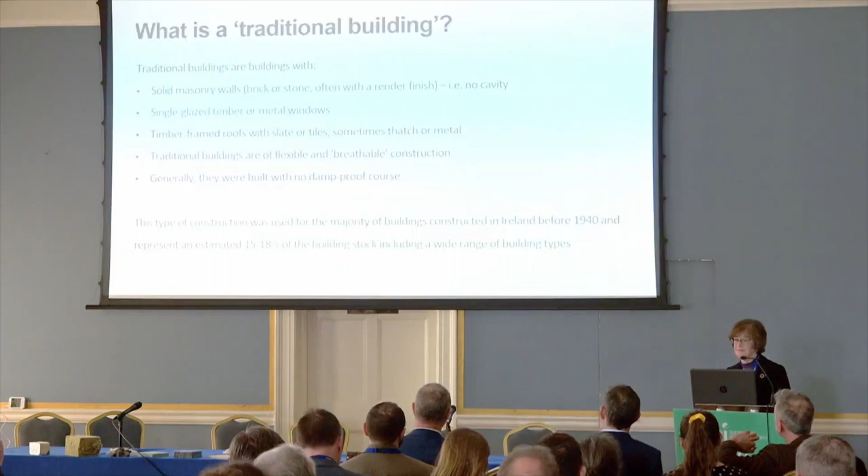So what is a traditional building? We've defined it as buildings built with solid masonry walls, maybe masonry, brick or stone, often with a rendered finish, so not cavity walls. They were usually built with single glazed timber or metal framed windows, timber framed roofs, and slate or tile coverings, sometimes thatch or metal.

And they're flexible and of what we call breathable construction, generally built with no damp-proof courses. This was the type of construction used in Ireland for the majority of buildings built before, say, 1940, and it could be between 15 and 18% of the existing building stock.

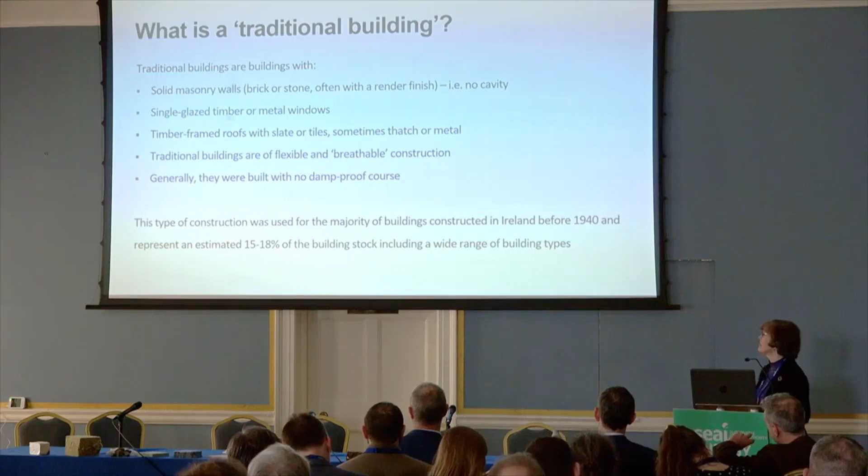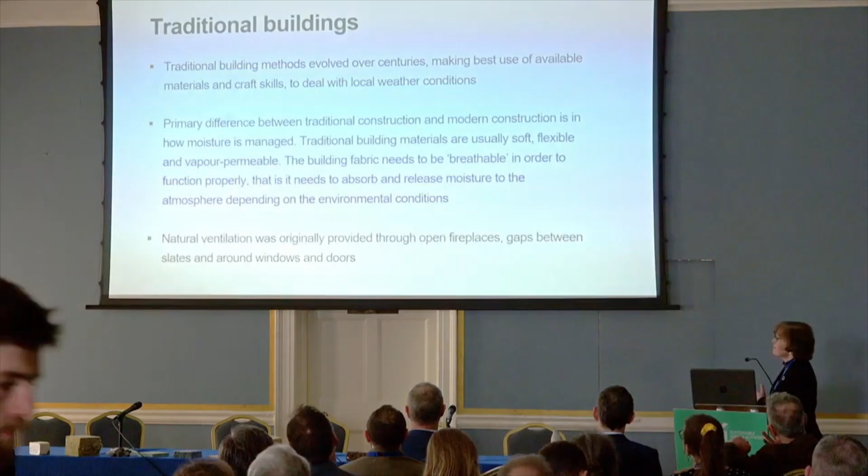So the methods used to make traditional buildings evolved over the centuries, using local materials and local craft skills. They knew, by trial and error, what the local weather conditions were and how best to provide shelter. The main difference between traditional construction and modern construction is really how moisture is managed within the building fabric.

These building materials are usually soft, flexible and vapor permeable, and need to be breathable - able to absorb moisture from the atmosphere when the weather is wet and then release it when conditions improve, without the moisture penetrating right into the interior of the building. There was also a lot of natural ventilation through open fireplaces, gaps between the meeting rails of sash windows, and around windows and doors.

But it's important to note these buildings weren't built to be drafty. They may have become drafty over the years as buildings settled and joints opened in windows and doors, but people didn't build these buildings to be uncomfortable. They were built to the standards of the day, to provide comfort for the inhabitants.

So it's important to stress that these traditional buildings and the works needed differ regardless of statutory protection - we're not just talking about protected structures and architectural conservation areas. We are really talking about how these buildings were constructed and the building physics in which they operate.

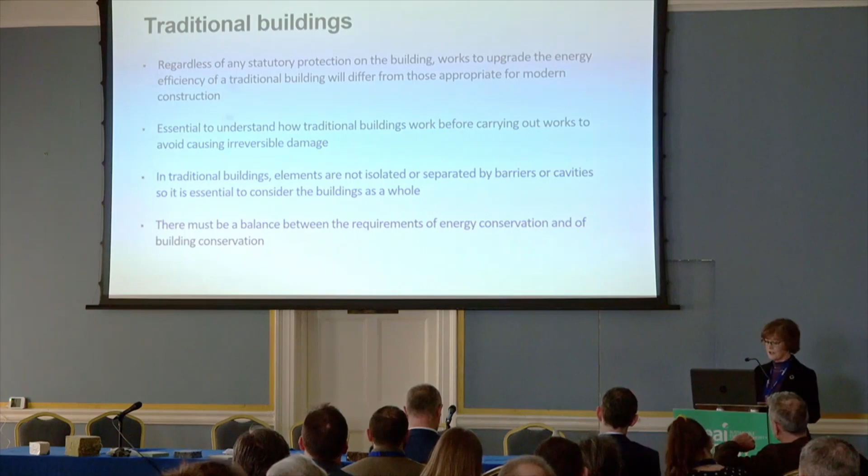So we produced a book, back in 2010, just to advise owners on what they needed to bear in mind when commissioning works to their buildings to upgrade them. It included a couple of small drawings to show the differences between modern construction and traditional construction - it's been compared to the difference between a raincoat and a greatcoat, though I don't think the term greatcoat is used that often anymore.

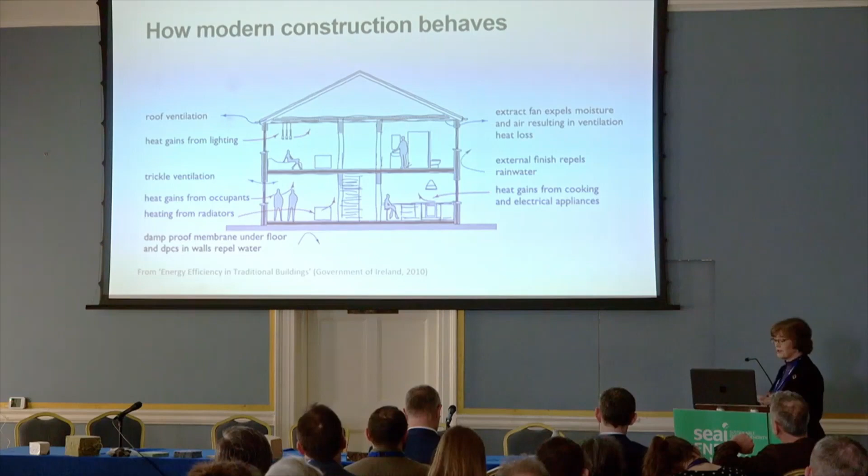A raincoat is all about repelling moisture from the building, making sure nothing gets inside. So modern construction has dense, hard renders on the outside. They have deep foundations to make sure the building doesn't flex at all. They have damp-proof membranes under the floor and damp-proof courses within the walls. And then you have to provide ventilation, trickle ventilation through the windows maybe, or extractor fans and the like.

Whereas traditional construction accepted the fact that they were going to absorb moisture, that it was going to come up through the floors and dissipate into the house, and come in through the walls but not penetrate the whole thickness of the walls. Before then, they were allowed to dry out. There was a certain amount of gratuitous ventilation provided through meeting stiles of windows,

gaps between slates and open fireplaces as well. So there are risks associated with altering a building that has been giving good service for 150, 200, maybe even more years.

Therefore, we would claim that the specification of retrofitting works should generally only be undertaken by those that are competent and have the necessary skills and experience, and know what they are dealing with and what the likely outcomes are. Where a project is particularly complex or the building is of high architectural heritage significance, there's yet another particular skill set that will be required of the specifier and the installer.

But there are certain low-risk interventions that a good, skilled and experienced contractor or craftsman can do, particularly where the building isn't protected.

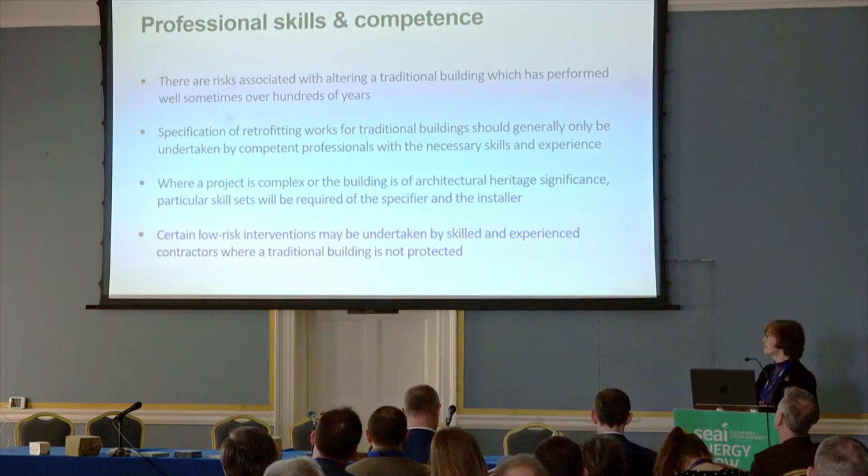There are several different types of statutory and regulatory requirements that you need to be aware of. There are actual, living, working buildings that are protected under the National Monuments Acts because maybe they have some medieval or early fabric in them. But the majority of the architectural heritage of this country is protected under the Planning and Development Acts, where buildings can be protected structures, located in architectural conservation areas, and there may be other buildings protected in various other ways.

Building Control Acts and regulations are another thing to bear in consideration, and it's important to note that buildings protected under the National Monuments Acts are exempt from having to comply with the building regulations.

Building energy rating then, coming out of that. There are a number of exemptions for the requirements for BER and for compliance with TGD L of the building regulations, and that includes protected structures, buildings used as places of worship or for religious activities, and buildings protected under the Monuments Acts. So a lot of those will be of traditional construction. But that's not to say people won't want to upgrade the energy performance of these buildings, and it is possible, but just to know they don't have to chase the particular legislative requirements.

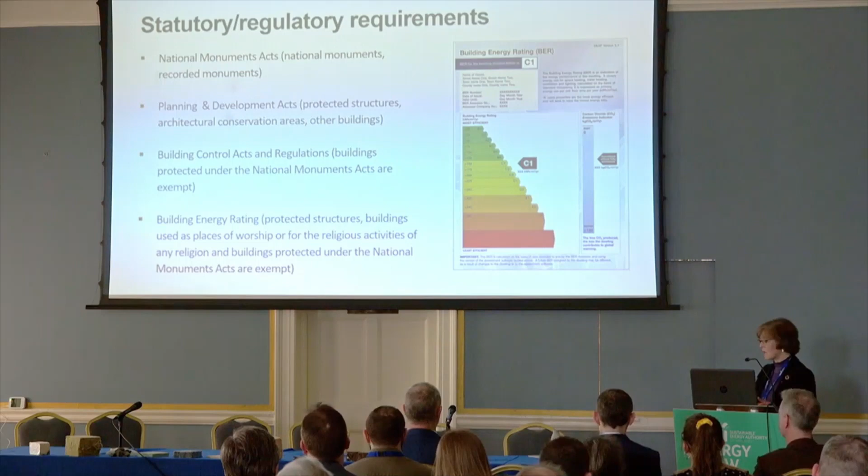Important, before you start doing any works or even considering them, that you understand your building: approximately when it was built, what its architectural heritage significance is, what construction methods and materials were used, and what kind of alterations or interventions may have taken place later, and whether they are appropriate or not.

There may have been interventions such as a lime render being removed and replaced with a cement render, and maybe that should be undone now to allow restoration of the vapour permeability of the wall.

And then it's important to look at the condition of the building as a whole, because before any retrofitting works begin, it is really important that your building is in good repair and dry, because a damp wall transmits heat at a higher rate than a dry one will. To the extent of 20 to 30%, energy efficiency improvements could be made just by having a dry wall.

Now, it can be a long process to dry out a masonry wall that could be 800 millimetres thick if it's a medieval wall, or even larger.

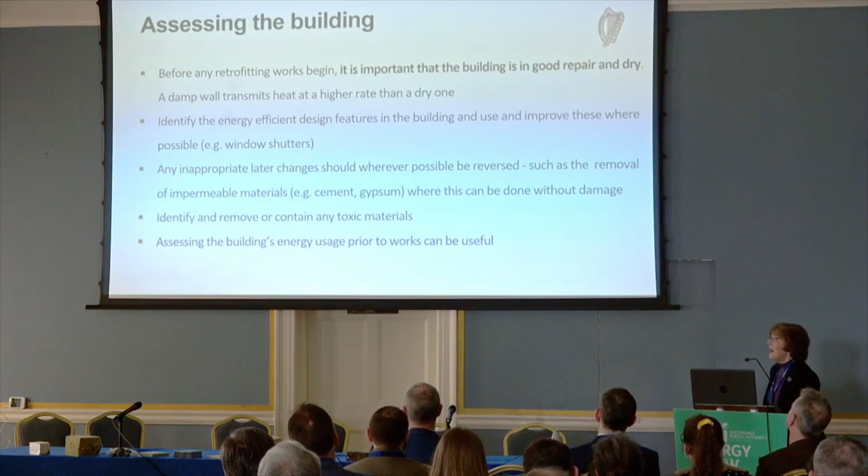Also look at your building and see are there any energy efficiency design features in the building and how you could use and upgrade those. Many buildings, particularly from the Georgian and Victorian periods, the 18th and 19th centuries, would have had timber shutters, and they can be upgraded and provide very good energy efficiency when they're closed. Again, any inappropriate later changes, try to reverse them where it can be done without damage.

Many times it can be very difficult, damaging and expensive to try and remove things like Portland cement from pointing or render and the like, so that will need to be carefully assessed as to whether it's worth doing or not. Obviously, identify and remove or contain any toxic materials in the building.

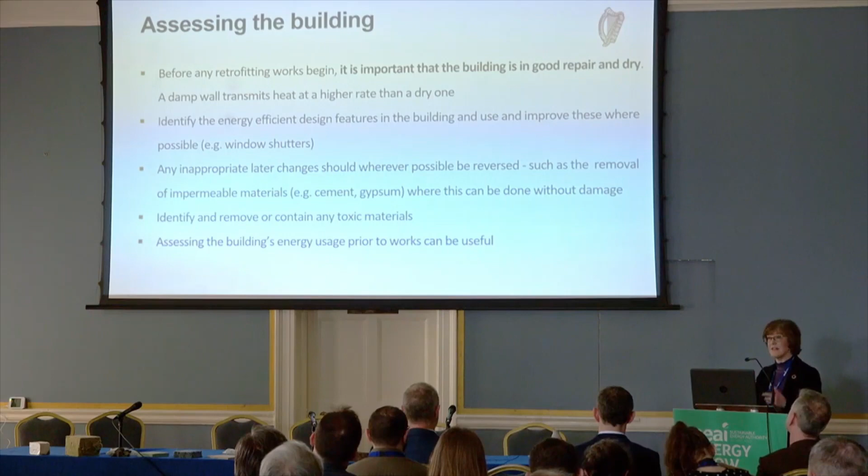It can also be very useful to try and get an assessment of what the building's energy usage was before the works were carried out, so you can compare that to what you're getting at a later stage after the retrofitting works. You need to pay careful attention to ventilation and indoor air quality in these kinds of buildings.

Air tightness, ventilation, and indoor air quality are all interdependent, and any retrofit plan needs to address all these together, because good ventilation is critical to the well-being of most traditional buildings. If you get high moisture content within timbers in your building, you could make things like timber joists, timber rafters and the like very vulnerable to rot and insect infestation.

You also need to be very careful that you don't trigger any interstitial condensation - condensation that happens within the depth of a wall - and that can be very damaging because it's invisible. And as we've all learned over the last few years, people too require properly ventilated living spaces for their health and comfort.

Just to say a word about sustainability in historic buildings, because many times we're faced with people who say the best thing you do is knock it down and build a new A-rated house. But actually, the greenest building, as has been said, is the one that's already built. It is there, it has already paid off its carbon footprint by lasting for hundreds of years.

The continued use and reuse of our older buildings is going to be extremely critical going forward to avoid greenhouse gas emissions, because too often, up till this, carbon reduction strategies for the built environment have really concentrated on the operational emissions - the amount of energy that goes into heating, lighting and using a building and the performance of the fabric - rather than looking at the carbon issues as well.

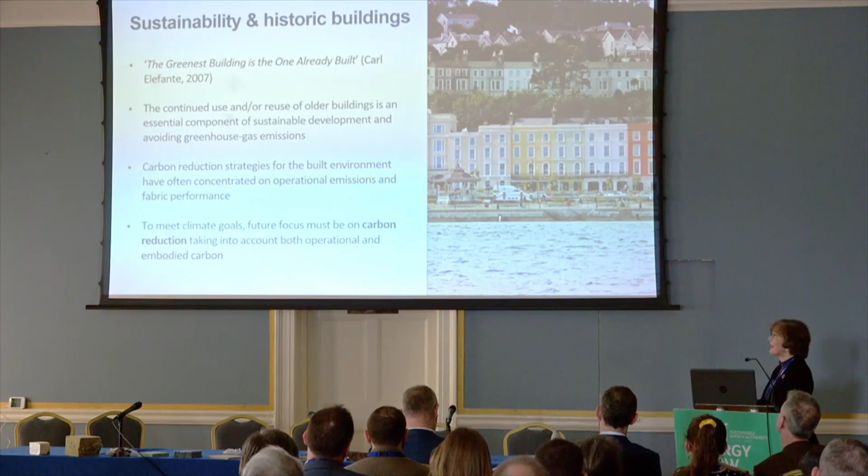We really do have to take account of the carbon emissions when we're looking at our buildings, because that's what counts - how much greenhouse gas is going into the atmosphere. So we're looking at life cycle analysis as well to assess the sustainability of new buildings versus maintaining, refurbishing or replacing existing buildings.

We have to bear in mind that if we demolish a building, we lose all the embodied energy in it, we lose most of the materials in it. That all has to be carted off, put in landfill. And then we have to also bring into account the production, importation, bringing to site and construction of a new replacement building and the kind of emissions that that entails.

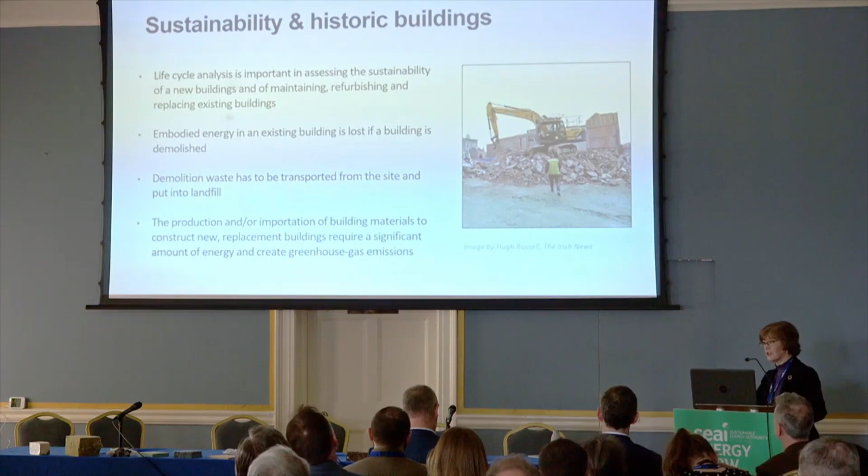Studies have been done - we're commissioning a study here as well - but studies have shown it takes decades to replace a standard size two-storey traditional building with an A-rated modern construction. So we don't have that kind of time anymore to get the emissions under control.

Our older buildings were designed to maximise natural sources of heating, lighting and ventilation. Energy, when these buildings were built, was expensive compared to people's incomes. It was really only in the second half of the 20th century that fossil fuels became very cheap and central heating and the like became standard in housing.

But older buildings were actually built to try and contain the heat, to provide comfortable living conditions. Our building stock is also made of very durable, long-lasting materials with reduced refurbishment cycles, and therefore in the long term, over their lifespan, they will use less energy. Generally their building elements are very easy to repair - it's easy to repair joinery, to take out a rotten piece of a window and replace it with just a single piece, or to repair ironwork as well.

So we produced guidance when all the architectural heritage protection legislation first came into force. These guidelines were originally for planning authorities to tell them about their new roles under the Planning and Development Act. But these are the principles of conservation that are internationally accepted and agreed to, and we just re-explain them in an Irish context.

So not in any particular order: it's about keeping the building in use, giving it a viable and economic use and value to its owners, researching and analysing the building itself, using expert conservation advice to make sure that any changes you make will not be detrimental to the building, protecting what is special about it in the first place, minimal intervention—trying to do as much as is necessary and as little as possible, as the Burra Charter says—repairing rather than replacing, using the right materials and the right methods.

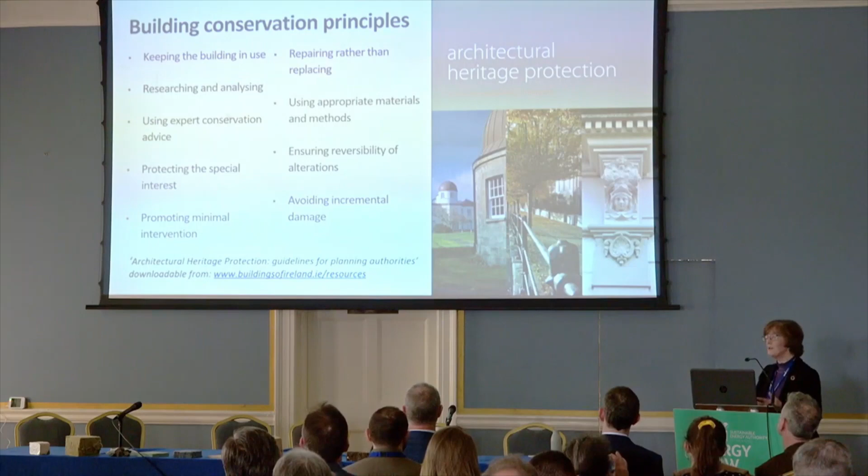And then making sure wherever possible that things can be reversed. I think this is particularly the case with retrofitting, so that if something goes wrong and it's shown not to be working and it's damaging the building, it's possible to take it out without having caused irreversible damage. And then avoiding incremental damage by small changes that on their own might not seem too bad, but cumulatively can really damage the character of a building.

But a lot of these also fit into the kind of principles we should have for retrofitting: good maintenance, keeping the building dry and in good repair, using compatible materials—the correct ones that are vapor permeable, capillary active when you're using mortars and the like—making sure there is adequate ventilation for the health of both the building and its occupants, minimising waste, so wherever you can, upgrading and repairing existing elements rather than throwing them out and replacing them, and balancing the need to conserve energy with minimising the impacts on the character of the building and its historic fabric.

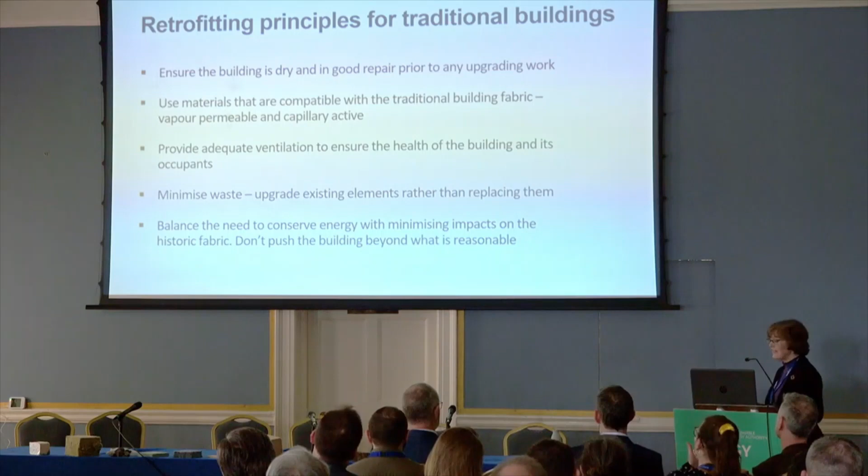And really, it's all about not pushing the building beyond what it can reasonably achieve.

So to get onto the guidance that we're going to publish later this year, it builds on this document that we produced in 2010, which was for owners, but this one is going to be aimed at the professional user, the specifiers, the installers of retrofitting works. But we do hope they'll be readable and understandable by a wider audience.

So it's going to be more strategic than prescriptive. It's very hard to have standard constructional details or standard retrofitting details for historic buildings, because almost all these buildings are different. Even if they were built at the same time, they'll have evolved differently—there'll have been changes to them over the course of their lifespan. So we're going to illustrate good practice and establish the principles and processes to be followed. It's going to be titled Improving Energy Efficiency in Traditional Buildings.

Just to give you a brief idea of what's going to be in it: Chapter 1 is going to explain what we are calling traditional buildings and the kind of buildings covered by the guidance, the statutory regulations that apply when you're altering a traditional building, and issues to do with the building energy rating system and its application to traditional buildings. There are issues about BER and how it rates traditional building fabric, which you're going to hear more about later—they're often very much underrated in how they perform, their thermal performance.

And that leads to problems then, that people may overspecify retrofitting works that the building actually doesn't need, and then you don't see the savings you were expecting, because actually your building was performing much better in the first place before the work started.

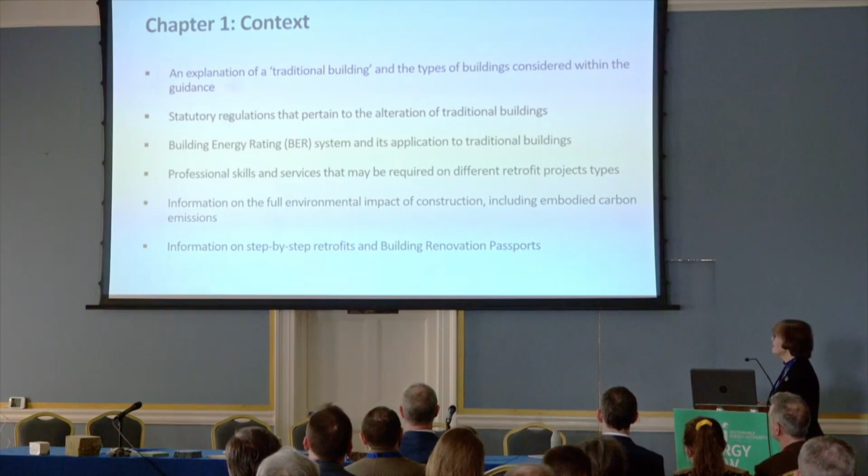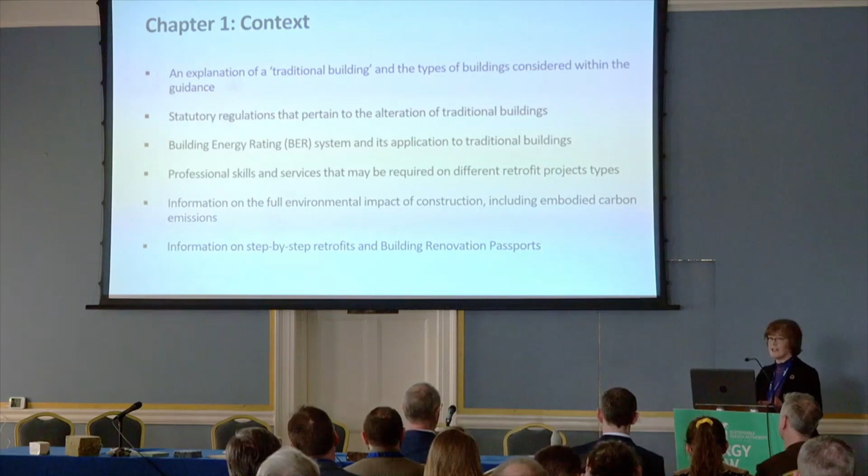We talk about the professional skills and services that might be required. Information then on the full environmental impact—we're really only touching on this—but taking into account the full environmental impact of construction and the embodied carbon and other greenhouse gas emissions. And then information on using building renovation passports to do step-by-step retrofits and make sure you don't get locked in by early decisions that might preclude later, better upgrading measures.

Chapter 2 will talk about understanding the physics of traditional buildings and how they work, how moisture moves through the fabric, how you might assess the building to determine if there are any thermal bridges, air leakage, or any existing damage, how to calculate U values for traditional buildings, and then the kind of risks there might be associated with retrofitting, like indoor air quality issues mentioned before, the build-up of harmful substances and gases, and how to avoid this happening.

The meat of the guidance will be in Chapter 3, which is about the retrofitting measures that are available, the steps that need to be followed when developing a retrofit strategy, and the works you need to do before you even start. This covers the materials appropriate for retrofitting works on a traditional building, preparing and installing different measures for different elements of the building—roofs, floors, windows and doors, and walls. Walls are probably the most problematic when it comes to upgrading a traditional building.

And then we look at other non-fabric efficiency measures that might be easy, low cost and easy to implement.

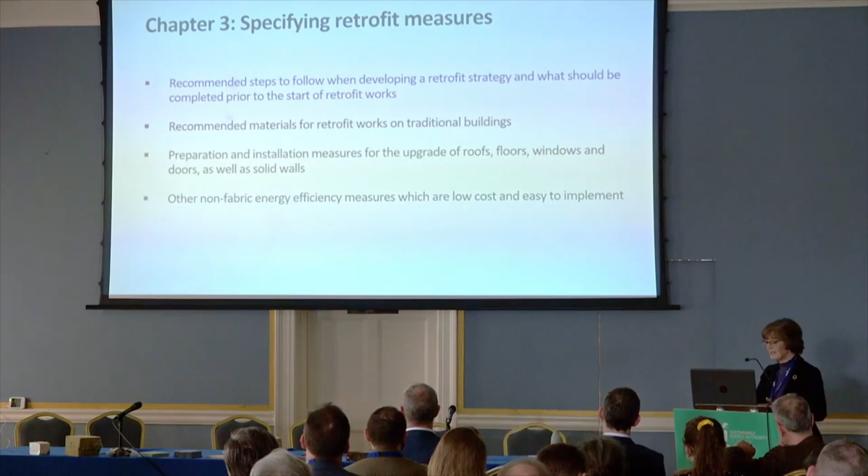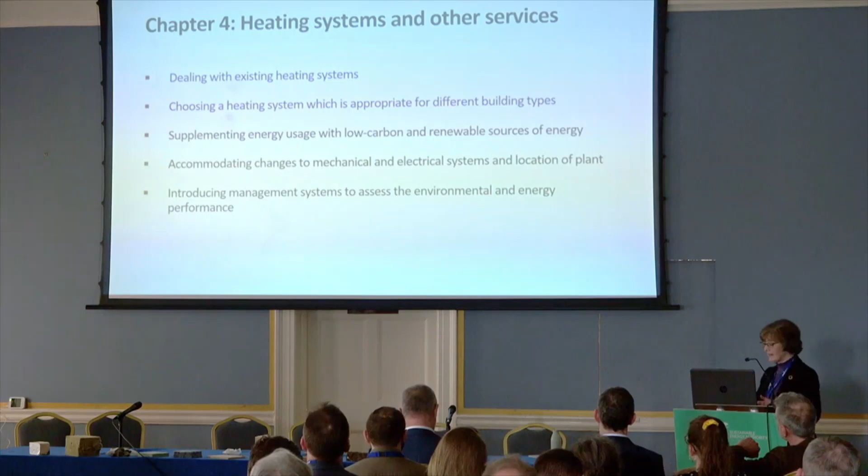Chapter 4 then looks at dealing with existing heating systems, choosing new heating systems, and what might be appropriate to different types of buildings, and how you might supplement energy usage with renewable sources. It also covers accommodating changes—this can often be a problem—and locating plant: where does it go, what impact would that have on the character of the building, or even just the structural capability of the building to support these. And then looking at management systems that help assess the environmental and energy performance of the building.

Then we have a chapter on case studies. We may end up publishing these separately because things are moving on so quickly, but we look at a number of different building types—the ones that come to us most often looking for energy retrofitting works. These are largely hypothetical typologies, chosen to reflect the most common traditional building types.

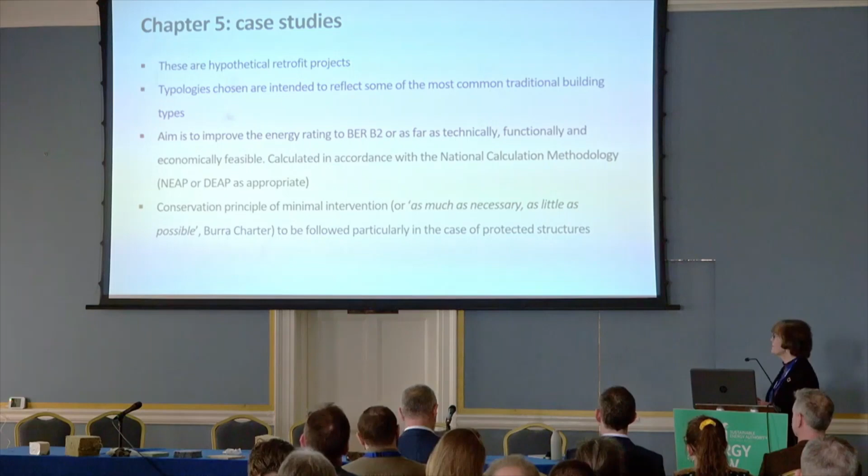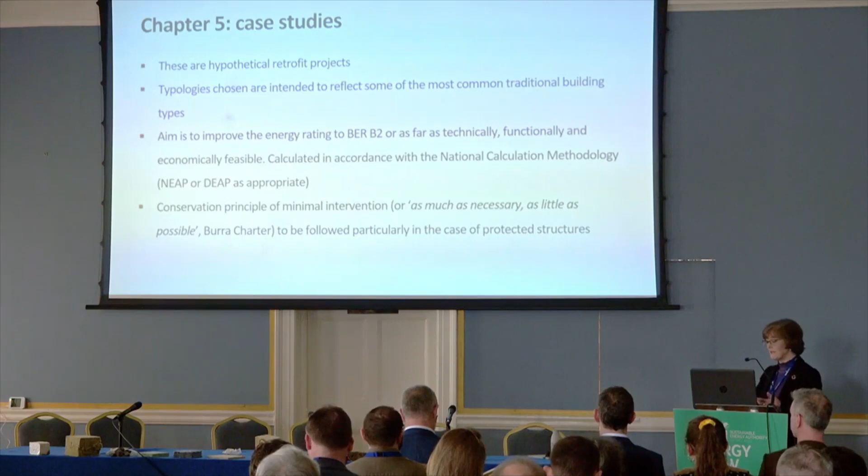The aim was to improve them to BER B2, or as near as is practicable, as far as it's technically, functionally and economically feasible. Some of these are calculated in accordance with NEAP or DEAP, depending which is appropriate. These followed the principle of minimal intervention as required by architectural conservation principles, particularly where some of these case studies were protected structures.

And then just to mention some of the related initiatives going on at the moment. We have commissioned a study into the embodied carbon and life cycle assessment to do with the retrofit of traditional buildings—looking at what the emissions are over the lifespan of the building: keeping the building as it is, retrofitting it, versus demolishing it and rebuilding with a much higher energy efficient building.

We're also looking to pilot a number of exemplar projects this year, working with OPW, with several of the local authorities, our own colleagues on the housing side of the department, and other institutions as well. We're trying to establish, demonstrate, monitor and publish best practice case studies, so that people will know—somewhere you can look to see what has been achieved by other buildings, what might be possible for appropriate and sensitive retrofitting of these traditional buildings—and kind of road testing the forthcoming guidance.

Oliver Cannan is going to talk to you about the SEAI research project, FabTrads, looking at the hygrothermal properties of a range of traditional construction in Ireland. We're hoping the findings will inform the BER ratings and the BER assessment, so they'll be of use for making sure our historic and traditional buildings are correctly assessed.

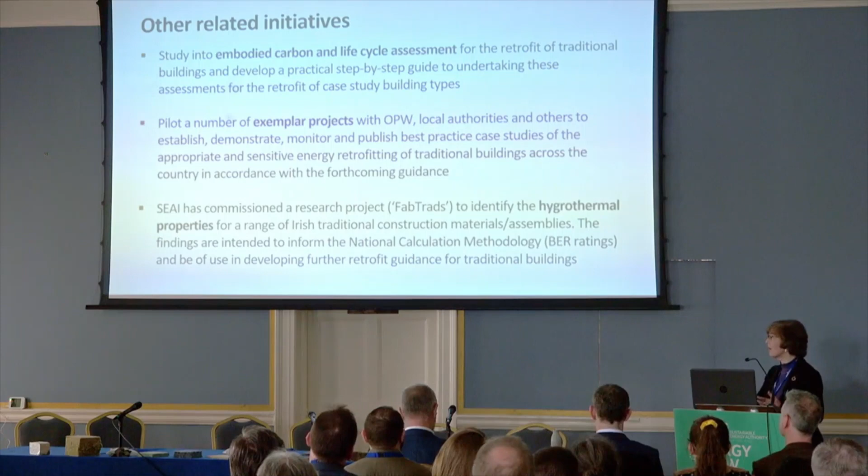And then there are many other issues out there that also need to be addressed. I suppose one of the most important of these is training and upskilling, so that we have the specifiers and installers there to carry out these works. Owners too need to know what their building is capable of, what pitfalls they should be looking for, and seek the best way forward for their particular building.

We're looking to see about developing grant schemes that are tailored to traditional buildings and their retrofitting, and looking at the kind of materials that are appropriate and making sure they're certified for use in the Irish market and on Irish buildings in the Irish climate. As I said, we're also looking at further studies into taking account of the embodied carbon in our existing historic building stock. So thank you very much.

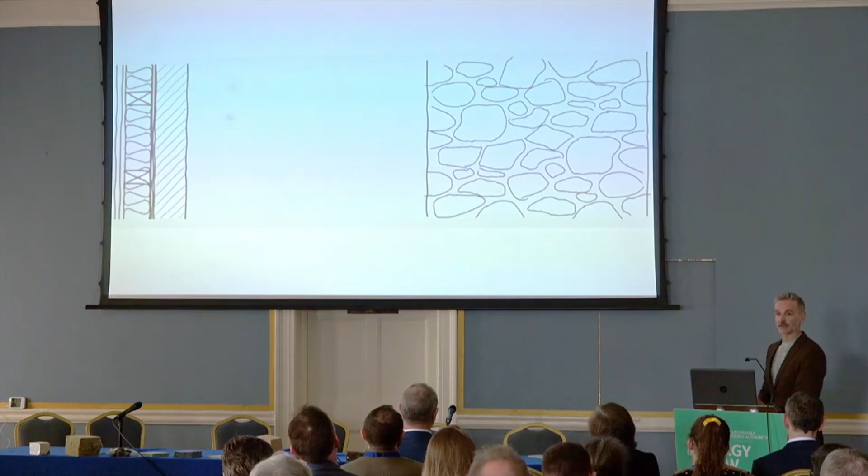The wall typology we're working with is this one here on the right, certainly not the one on the left which is common in the showrooms of the Energy Show behind us today, but rather rubble walls, solid stone walls, cut stone, solid brick, cob walls - the wide range and dimensionality of building fabrics that exist in traditional and historic buildings. These walls contain stones from all over the country, very different types of stone, and very different types of clay used to develop the range of bricks in our buildings.

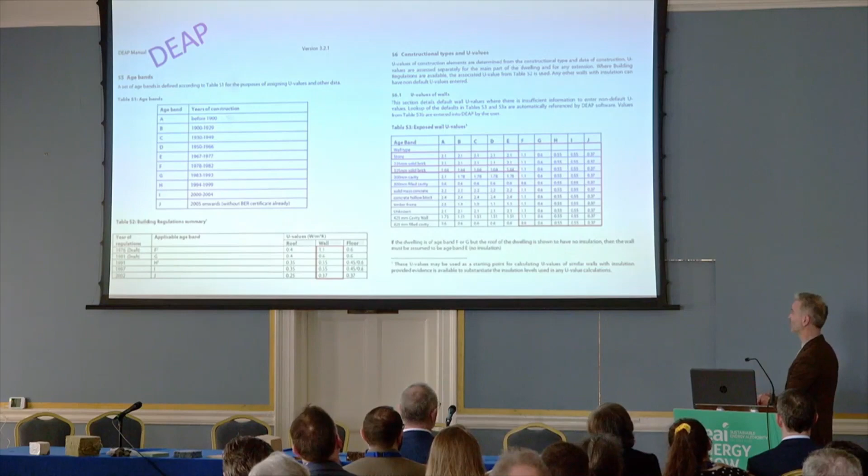So we're trying to gather and test as many of these as we can. The major aim is to try to correct for the lack of data in our national methodology for calculating building ratings. Essentially everything pre-1970s, and particularly pre-1940s, is given a default U value. All solid walls or stone walls are given a default U value of 2.1, often presumed to be on the high side, leading to people rushing to retrofit, and often retrofitting incorrectly or inappropriately. Otherwise, brick walls get a U value of 2.1, and 1.64 for 225 or 325 millimeter solid brick walls.

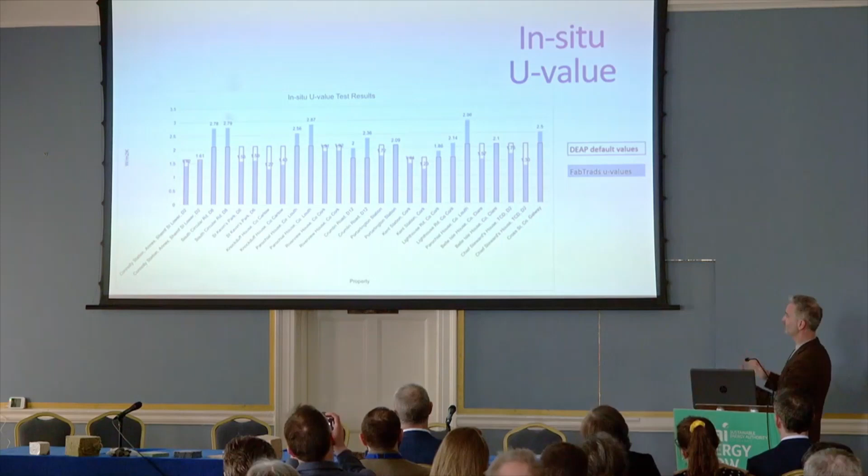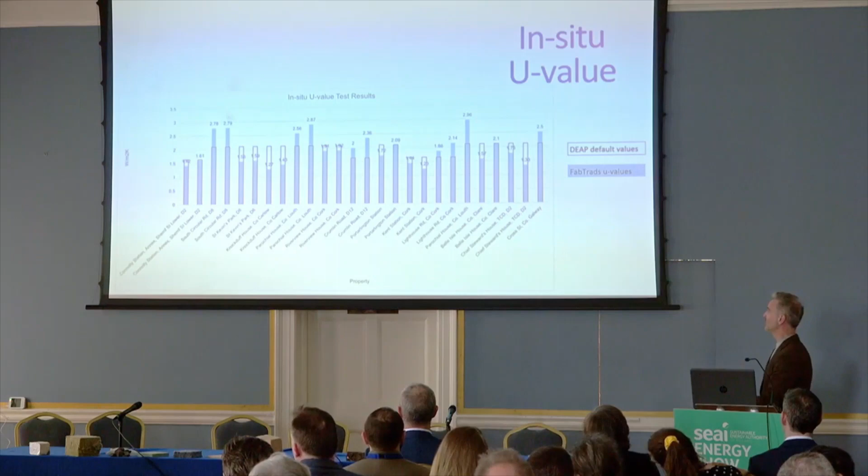So we're trying to fill this gap in knowledge. I'll come back to this slide later, but this is a sample set of the in situ U values we've done to date for a wide range of fabrics - this is very much Caroline's work. We're not seeing a major trend in any way. We are seeing a lot of traditional walls coming in below the U values, but for walls heavily saturated with moisture, we see them above the default U values specified in DEAP. So it's very much dependent on the in situ conditions.

Just to give you some examples of the work we're doing - I should say this is a 3-year project, funded by the RD&D 2021 call, and it kicked off 10 months ago. So we're very much in the early stages. The results I show today are preliminary, and hopefully we'll be invited back next year or the year after to present a more comprehensive data set.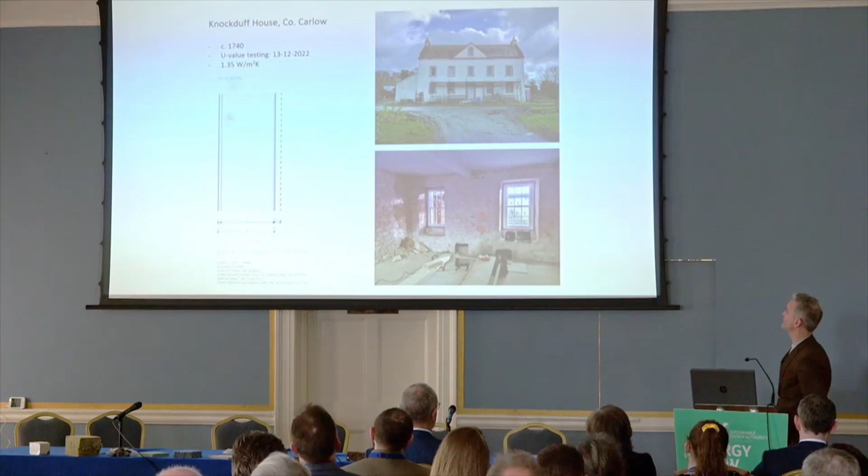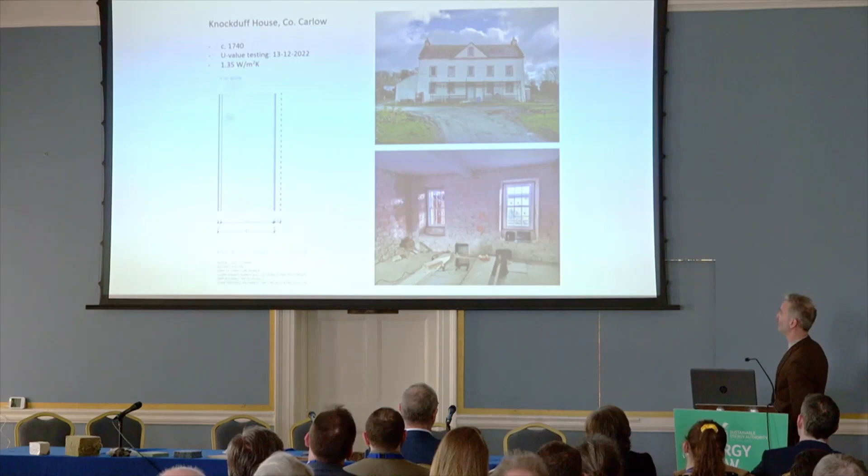This is an example of a stone building built in 1740, traditional construction, including a granite rubble wall with lime mortar or lime render on the exterior. In this building we are doing in situ U value testing, and then taking samples back to the laboratory at UCD for a wider range of hygrothermal testing. This is an example of a wall at 480 millimeters width with a U value well below the default - instead of 2.1, we're seeing a U value of 1.35.

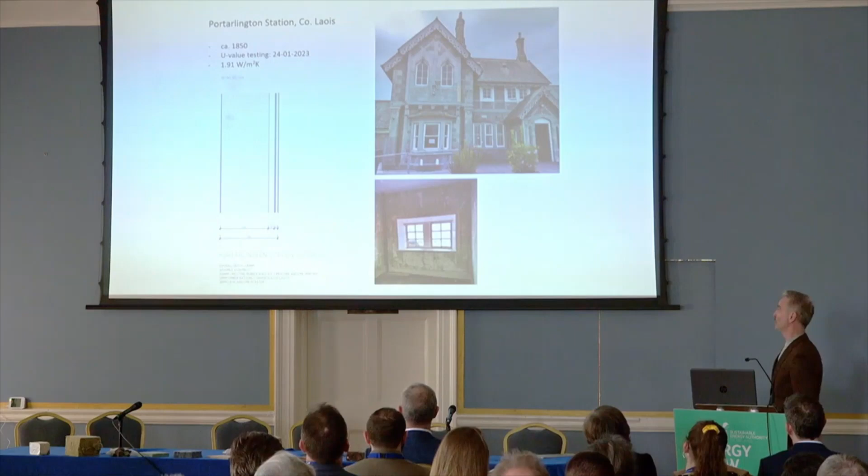Another example is a building with limestone rubble and limestone facing, battens, and a lath and plaster interior finish. Portarlington Station and Irish Rail have been very good to supply us with a number of very good case studies. Again we're seeing the U value of this building below the default U value of 2.1, at 1.9.

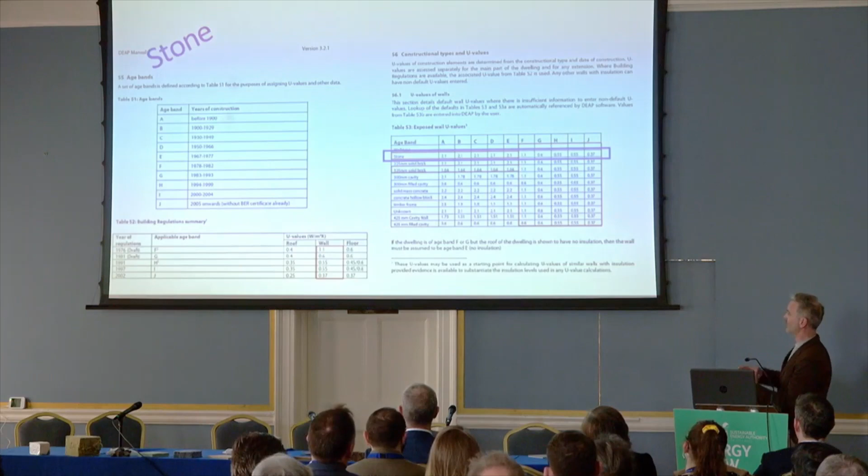So as I say, we're aiming to gather a wide data set of these typologies of buildings so that we can present a more nuanced list of stone or traditional building fabrics that can be used in DEAP.

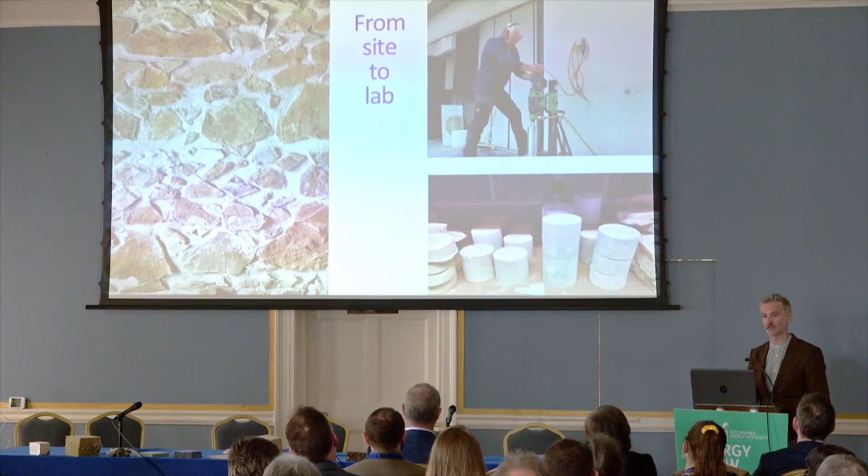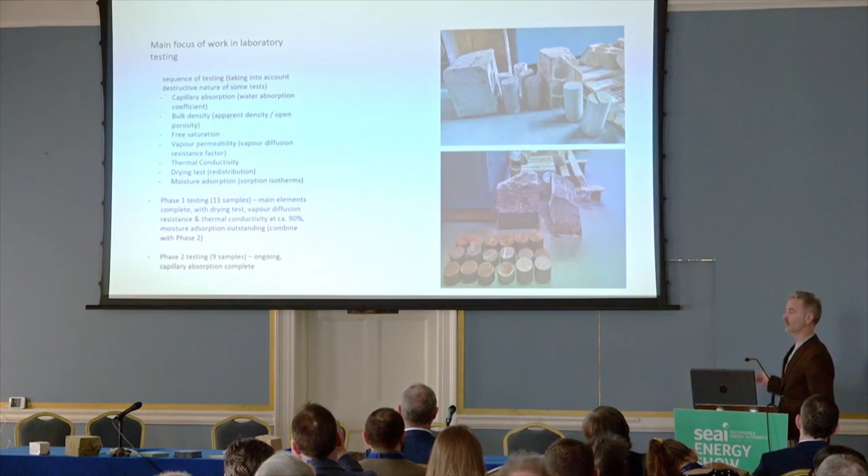What we do is take samples from the fabric, bring them back to the lab, and core them to make samples that we can test for a wide range of hygrothermal properties. These include properties the SEAI outlined for us, as well as properties that WUFI outlined, WUFI being the hygrothermal analysis software that will include this database of Irish samples in later iterations. So the sample set we're developing will be available to building designers and analysers so they can get an accurate picture of the materiality of Irish building fabrics.

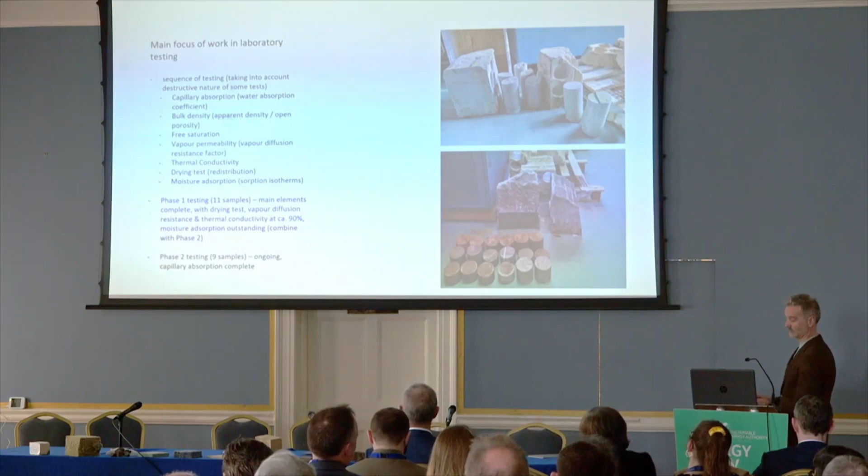The tests we're doing include thermal conductivity testing, which is key to understanding heat transfer through the materials, and the capillary absorption test, where we monitor the uptake of water through the fabric, a property relevant for driving rain or heavy surface moisture buildup.

Vapor permeability, in contrast, measures the permeability of the material to vapor movement through the sample. All of these are done to standards, though in certain cases we've had to adapt to suit the nuances of traditional materials, and we've done this in conversation with WUFI in many cases.

Bulk density testing allows us to get the density of the material, but also the porosity, which affects many of the other parameters. Moisture adsorption is essentially the uptake of moisture vapor, and we're testing that at a number of different relative humidities.

The moment, the big investments we've made on two multi-thousand-dollar climate chambers, both of them are causing us problems, so this test is stalled. That's essentially why we're presenting an incomplete data set today, it's a hardware issue we have.

Then a much simpler test is free saturation, which WUFI actually asked for, where we essentially dunk the materials in vats of water and then measure the uptake of moisture. So some quite complex tests, and some very simple, rudimentary tests.

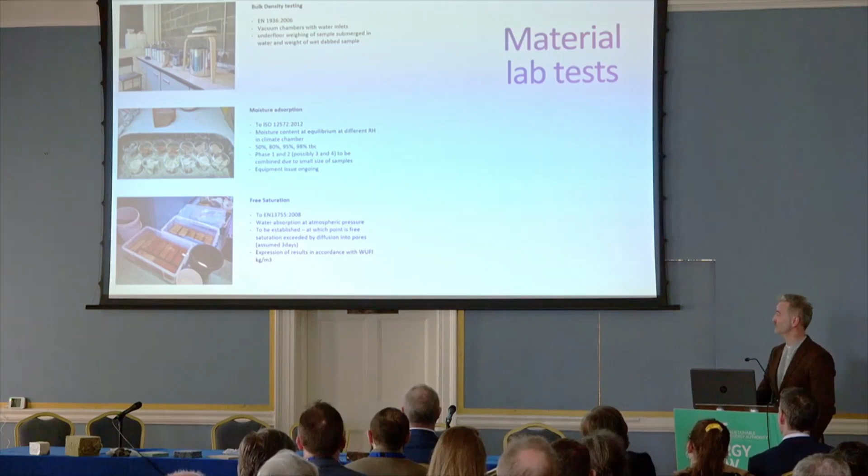Just to present, I suppose, very preliminary results to you, but maybe some contrasts that might be interesting. I hope this is visible to everyone down the back.

The top of the two highlighted materials is the granite that exists in the WUFI database, measured by TU Dresden, which has a porosity of 9.5% per volume of material. When we did our tests on Carlow granite, taken from the house I showed earlier, we got a porosity of 3% per volume.

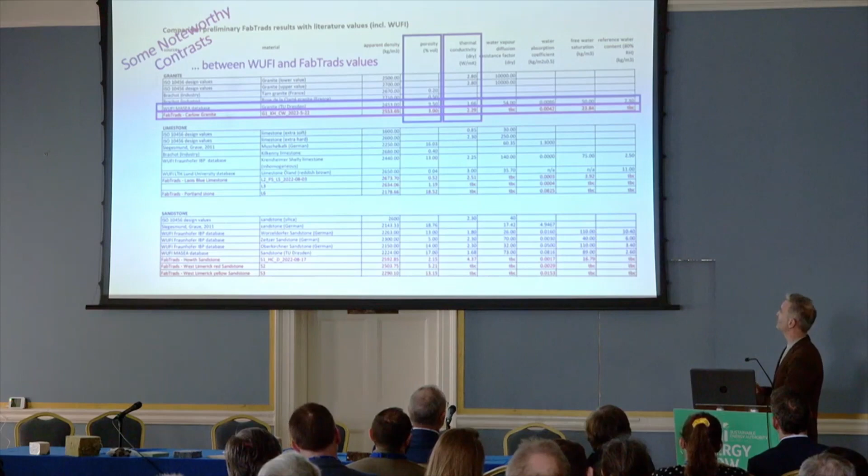The thermal conductivity value is higher because with fewer pores, it's more dense, and more dense materials have a better ability to transmit heat, so we get a higher thermal conductivity. We get a lower water absorption coefficient, again because it's less porous, and less free saturation. I hope I'm right in all those relationships, but that's one example of the varying characteristics we're seeing.

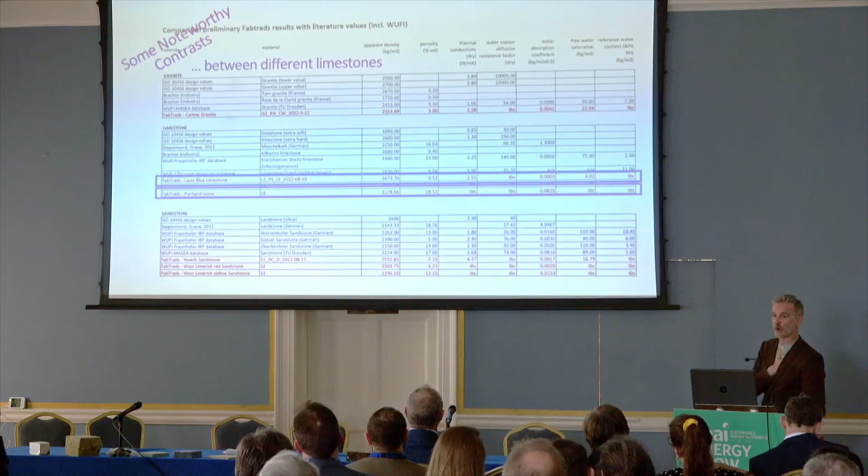We're also seeing quite a wide range of properties even within the stone types we're working with. If we look at two different stones, the Laois blue limestone and Portland stone, a sample of which we got from the Custom House, a much younger stone, it shows much greater porosity than the Laois blue limestone. As a result, although not linear and quite strongly non-linear, we're seeing a water absorption coefficient that's much lower in the Laois limestone than in the Portland stone.

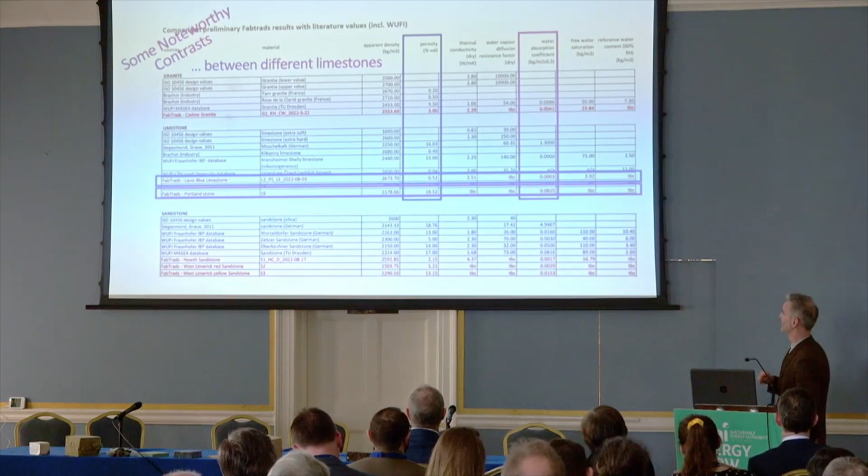We're still waiting on other results to complete this data set. We've tested a wide range of bricks, I think 8 bricks at this stage, and we're still searching for more, which I'll talk about towards the end of the project.

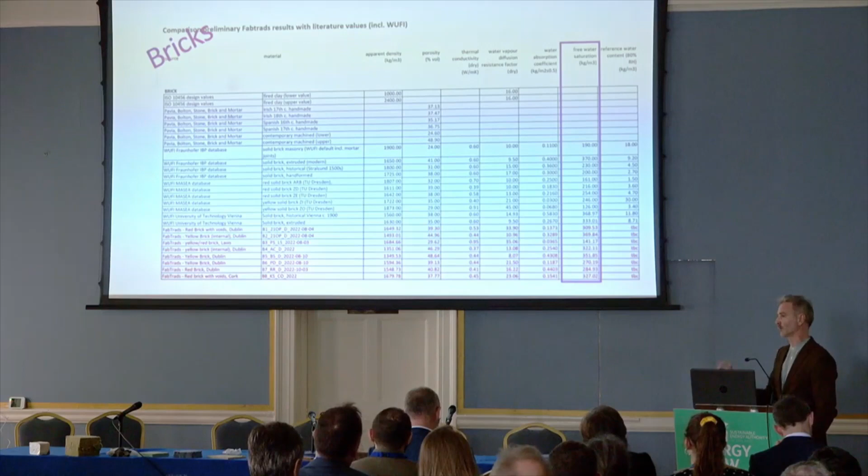What we're seeing is generally a lower thermal conductivity than what's documented in the literature for the range of bricks we have, primarily because the porosity is higher than that of the bricks documented, particularly in the WUFI database. As a result, we're also seeing a much higher free saturation level, meaning a greater likelihood of Irish bricks taking up water than those documented in Central Europe.

These are B2, B7, B10, three different types of bricks, I think primarily yellow bricks. And what we see is a wide variability across those samples as a result.

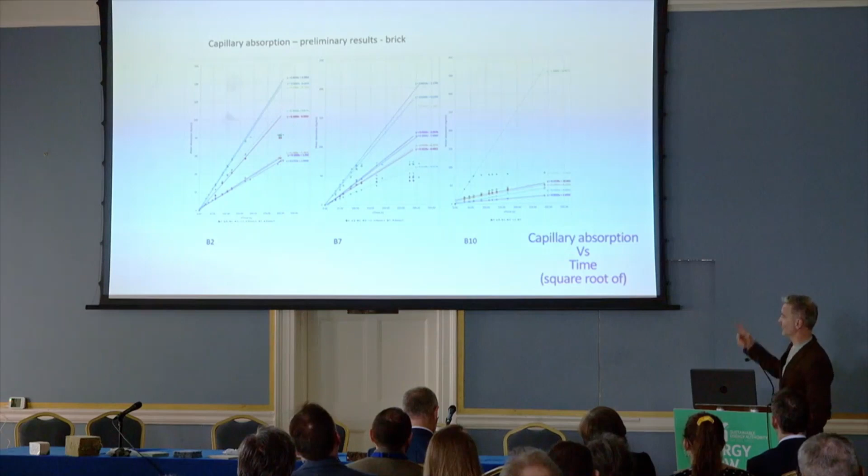These are results for capillary absorption against time, showing a much greater uptake of moisture as a result of the different capillary absorption parameters.

Some maybe somewhat obvious results, but we see thermal conductivity increase as the density of the brick increases, and decrease as the porosity increases. So thermal conductivity is on the y-axis, density and porosity on the x-axis for both images. Of course, bricks having a lower density have a much lower thermal conductivity than the stones, which have a much higher density and much greater thermal conductivity.

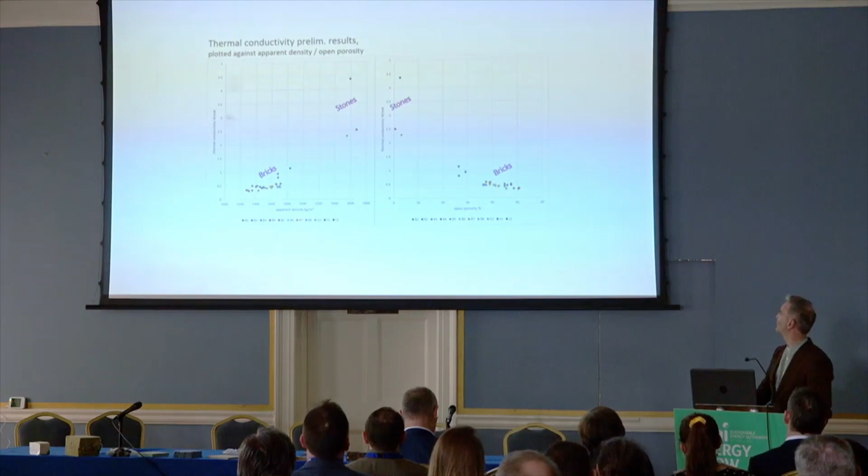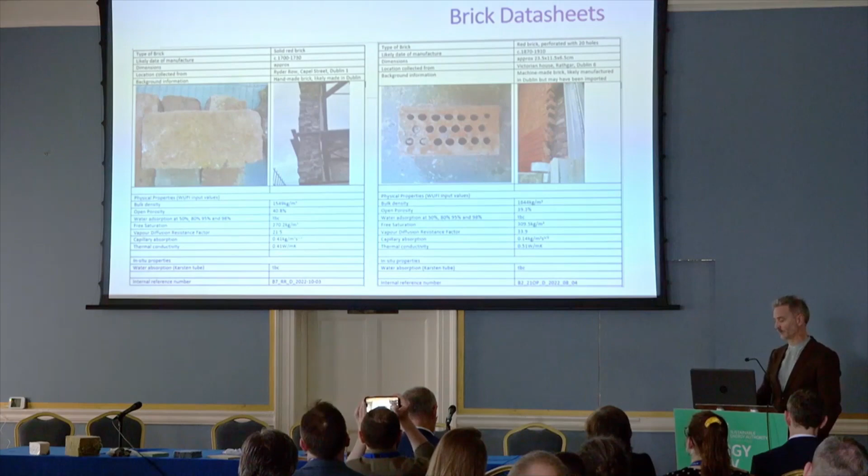What we're going to do with all of these results is bring them together to create data sheets for as many bricks as we can test with the funding we have, so that designers and building assessors can use them when analyzing building fabrics, particularly for retrofit. The aim is to develop this material data so that it will be available through WUFI, importable or selectable, so you'll be able to specify Irish bricks within WUFI to undertake your moisture risk assessment.

Here are some very early results from WUFI analysis that we've done, showing the difference between simulations using the FabTrads range of parameters versus the WUFI range of parameters.

I should explain these graphics. The outside is on the left of each of these walls. These are sections through wall build-up. In the top case, it's an uninsulated solid brick wall. In the bottom case, we've added insulation and render in both cases.

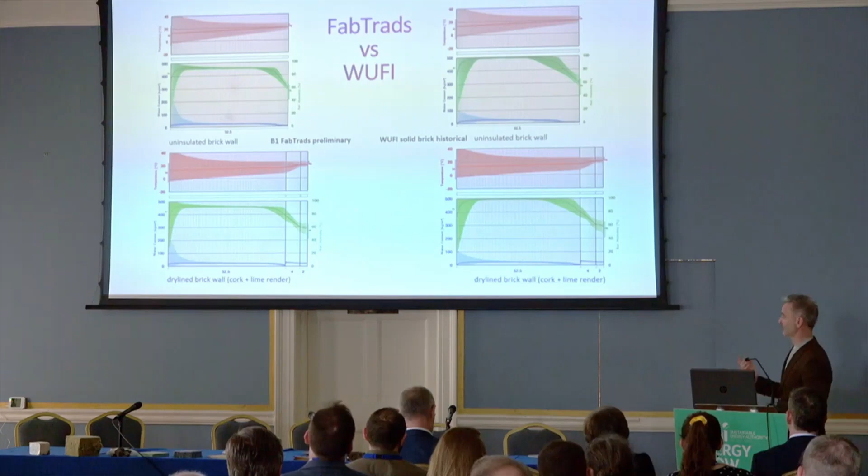We are seeing some differences in moisture response using the Irish parameters compared to the standard WUFI parameters. We need to complete the data set of parameters before we can draw any major recommendations from this analysis.

We've been playing around with different insulation types. The green in this case is the relative humidity, the blue is the water content, and the red is the temperature through the wall sections. The top simulation, the uninsulated brick wall, is on the left.

To the right is one that has been insulated using EPS on the interior. We see a very high relative humidity at the interface between the impermeable insulation and the brick, conditions that are very risky for mold growth, with relative humidities somewhere between 85 and 90%.

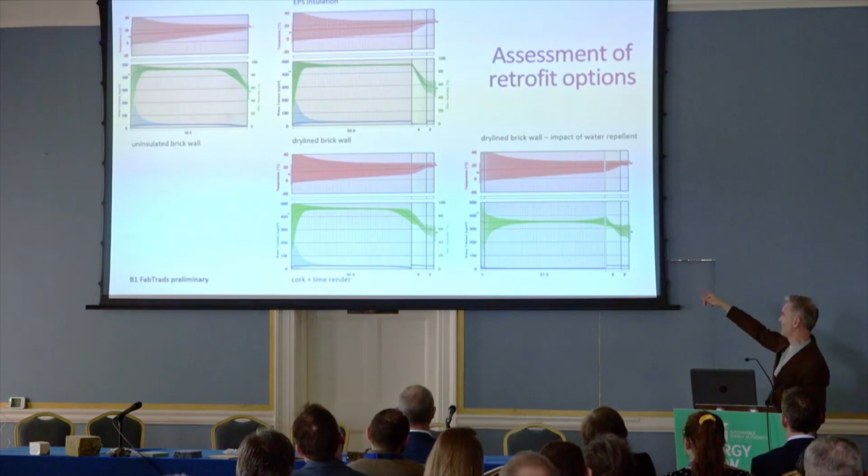Simulating using a cork and lime render, we see a much better moisture response, with a downturn in relative humidity close to the interface between the brick surface and the insulation layer.

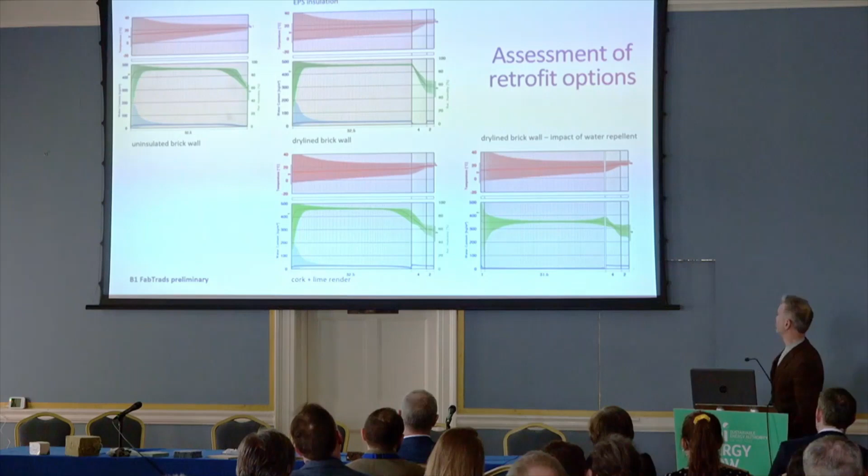We know it's not recommended standardly in conservation practice, but we've also been playing around with different water repellents on the surface of the brick. The early results show that moisture uptake at the brick surface is much lower, relative humidity in the wall section is much lower, and there's much less risk of moisture development.

This is a multi-year simulation, so ignoring the early stage and just looking at where it stabilizes. Each line represents the 1st of October, corresponding to the winter and summer peak and trough cycle.

The grey line corresponds to an 80% relative humidity risk threshold. The EPS insulated wall is much higher than that, with very dangerous conditions for mold growth. We do see permeable retrofit solutions also causing some risk at certain times of year, but then drying out as the weather warms. At the bottom we see the no-insulation solution, which yet might be the most appropriate.

It's early days and it's not one that we're going to jump to, but what we see in that case is that there's much less risk of mold growth because there's much lower relative humidity values at that dangerous interface between the brick surface and the insulation.

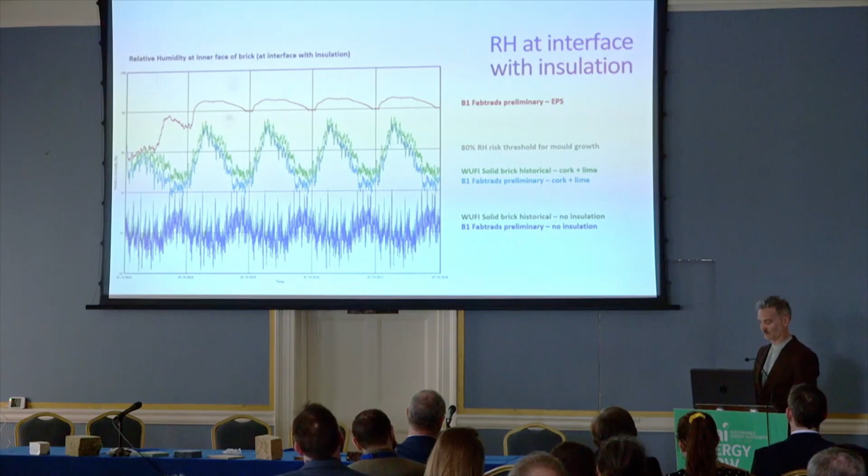From our perspective, what we are seeing is variability between the WUFI simulation and the FabTrads results, giving us some faith that the experimental routine is important and worthwhile.

I suppose all of this work related to the bricks will allow us build up a much more comprehensive and rich list of brick building envelopes, so that we can include them in the DEAP methodology.

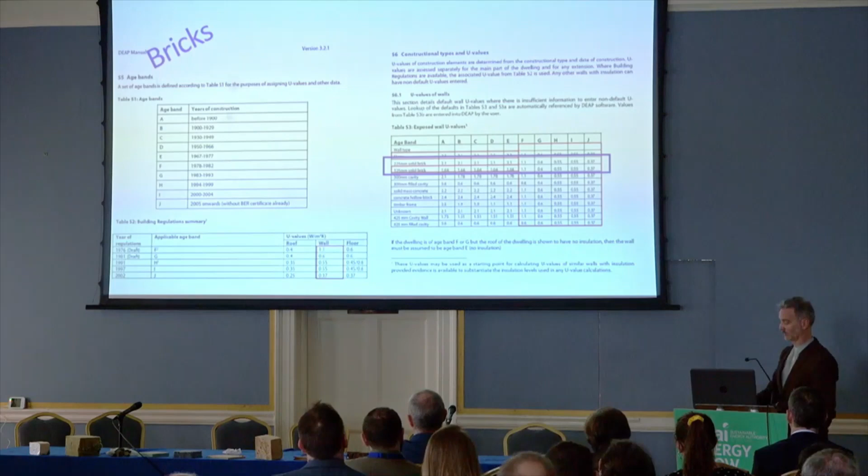We've only done a few of our U-value tests on brick fabrics, so we really can't conclude anything yet. But we are seeing a number of tests where the U values in situ are higher than the DEAP default values, and this is a challenge of the project.

It's very difficult for us in the in situ situation to control for moisture. In so many of these buildings, there is extensive moisture buildup when we do the tests, and in that case we are seeing the U values be higher than the default values.

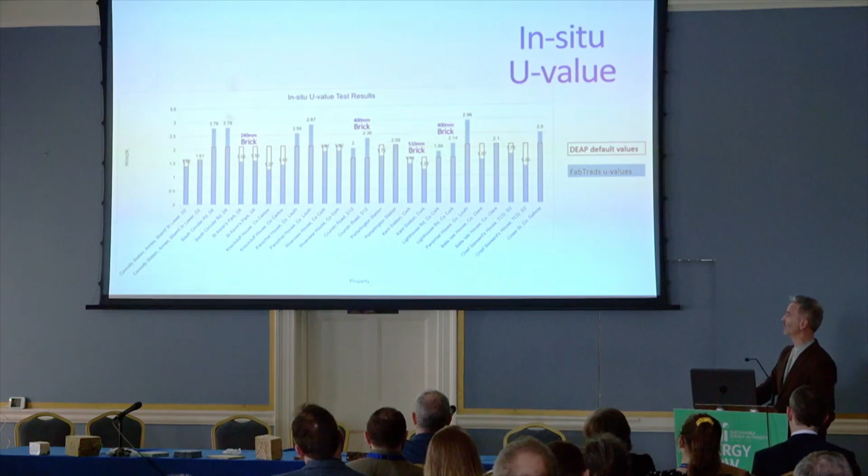In those properties where the walls are drier, we often see the U values in situ lower than the DEAP U values, but this is something that we will report back on and conclude on at a much later stage in the project. So that's it - that's an overview of initial results and the project.

I want to make a plea to people. Many of you might work in the field of conservation, and many of you might have access to buildings with a wide range of materials. Currently we are very Dublin-centric - a lot of our materials have come from the Dublin region or the regions around. We have very little from the West, and we're very keen to build up a kind of national database.

So if you do have a building that is enclosed and heatable, we can do an in situ U value test there. But that building also needs to be going through some level of deconstruction, so that we can take samples from that building and bring them back into the laboratory. So if you meet those criteria, we'd love to talk to you, and we'd love to get some samples, and we'd love to come test your building or a building you might know of.

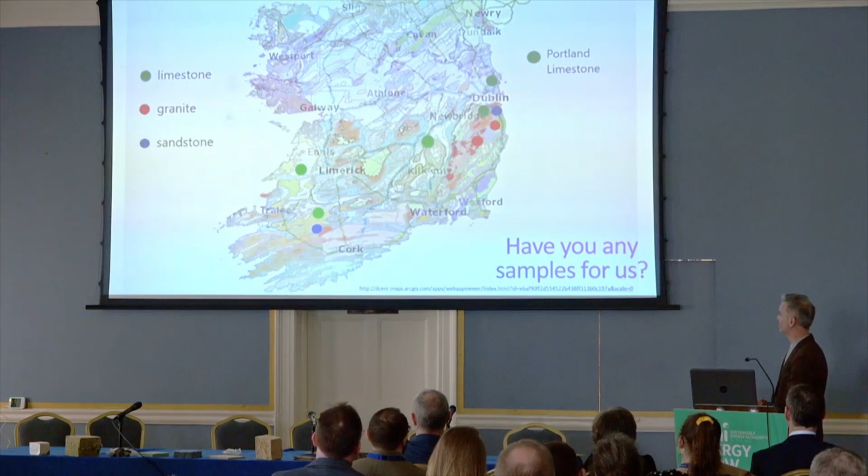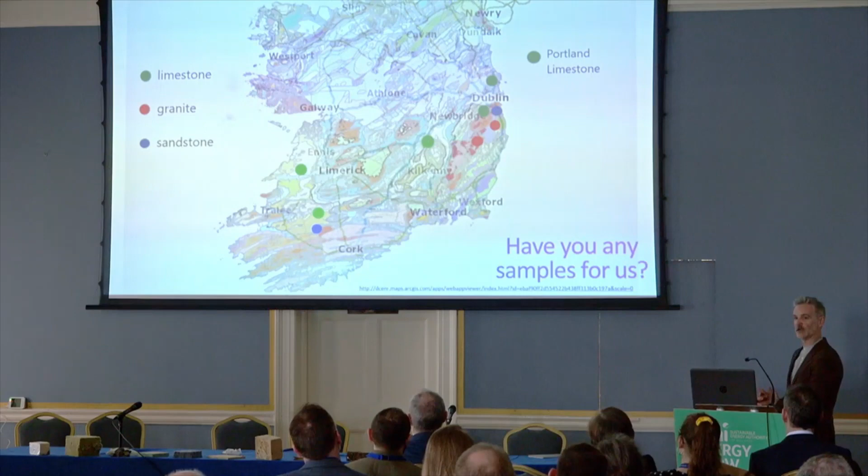There's a couple that we're really missing from our database currently. We have no Georgian red brick, facing red brick - it's just that not many Georgian buildings going through have their face deconstructed, so we're lacking that material. We're lacking cob buildings, particularly earthen buildings, and we're lacking a number of sandstones, particularly red sandstones. So do let us know if you have any of those, and I and the team are happy to answer any questions. Thank you.

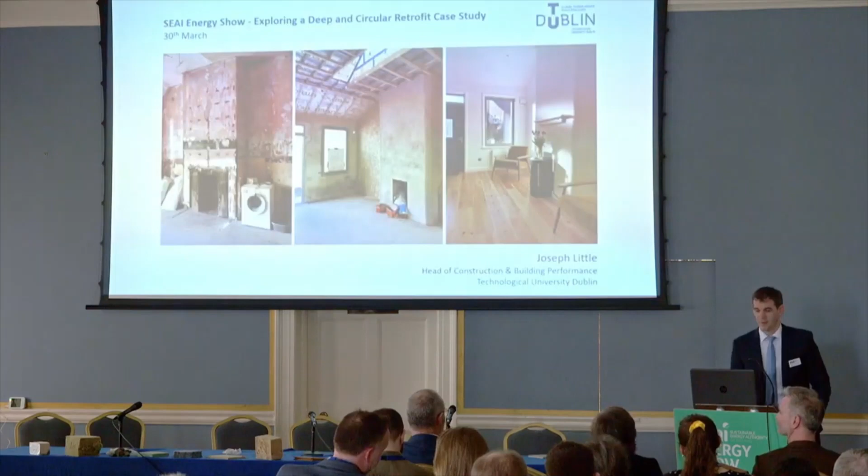Brilliant, thank you for that, Brian. That was two fascinating talks there, both providing really much needed guidance.

I just think back on when I started this kind of journey around 2009, even 2008, when the home energy retrofit scheme was piloted, and how little we knew. I wrote at the time a series of articles called Breaking the Mold, which was kind of asking, do we know what we're doing? And we know a lot more about what we're doing now than we did then, I think.

So interesting times. Just in terms of the hygrothermal concerns and moisture risk assessment and getting it right, it's nice to see UCD and TU Dublin working in parallel, because we teach the hygrothermal risk assessment module in the MSc in building performance. We teach it as a CPD, and we also teach it as part of year one or the postgraduate certificate in that programme, which is grant aided.

So if you want to understand those graphs that Oliver was showing you earlier on and those kind of concerns, you can come to us.

For the learning as a building design professional, you can look at their report in terms of some of the values that we should use. I've been teaching that whole subject since 2010 in both the UK and Ireland. I'm the leading lecturer in both areas, trainer, lecturer. And one of the things I've tried to do, and even write papers around, is to help people navigate in a context where that kind of information that Oliver and his team are uncovering was not available.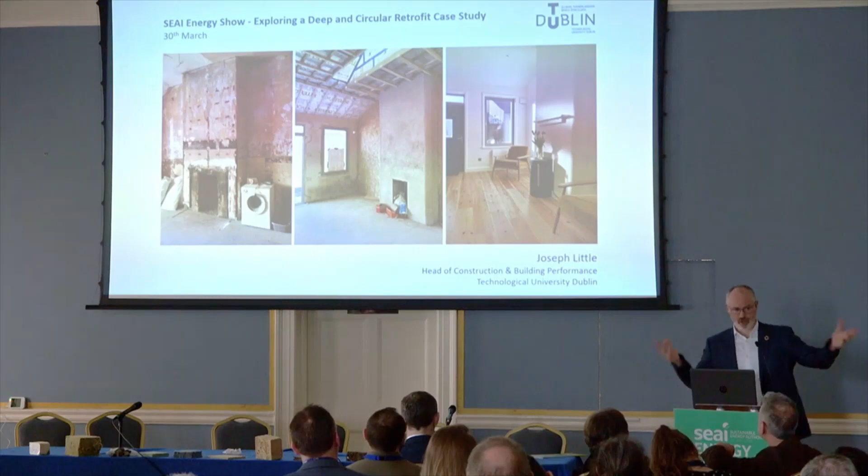So what do you do? How do you make sober risk assessments when you don't have all the information? It is possible to do that, to work in an accurate methodology, accepting that the precision is poor. But it's fantastic that we're close to getting more and more of this information. And of course, you could probably double or treble or quadruple the data set you're talking about, but it's a fantastic and very credible start.

So, well done to the funders and well done to the people taking part. This is like a sorbet because this is going to have almost no figures, and it's all about action, about judgment and building in work. It's a piddling, if you can say that in a public event, a piddling 38 square metre renovation. It's tiny, but it has many of the thinking, hopefully embodied in it, that we need to see in much larger projects, and even perhaps in the national agenda of making very dramatic and very deep cuts in our carbon. I hope it's being said today elsewhere. It's not a very nice thing to dwell on, but we are in deep trouble.

Planet Earth and the human citizens, but also the rest of the plant life and animal life on the planet that depends on us to be somewhat sensible. We're in deep trouble, and we actually need to change radically the way we do things. And we don't really think about that enough. I think Greta Thunberg's comment, you've no right to feel either despair or anything else unless you actually do something. And doing something is very empowering, it's very positive, it's exciting, it could be enriching. So that's my call to action, guys.

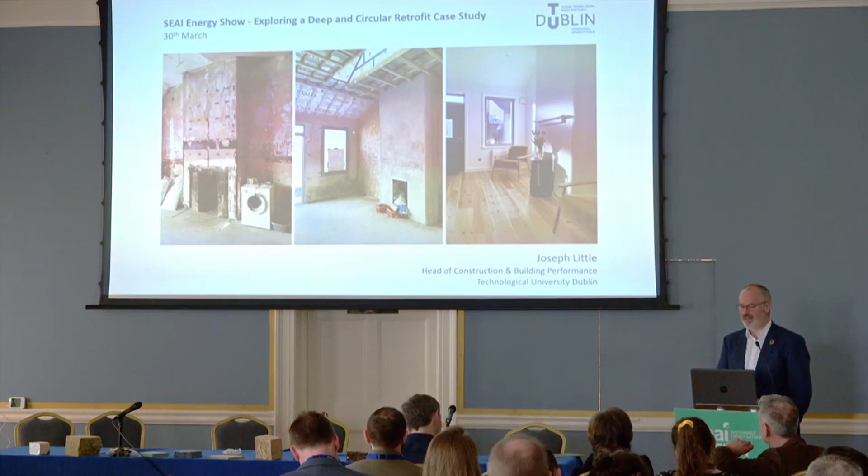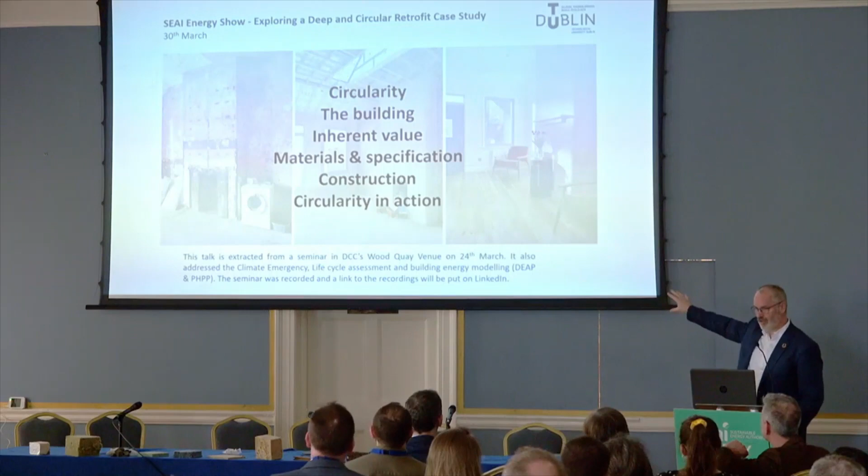Anyway, so in this little project, extracted from a seminar that I gave on Friday, it itself is an interim piece of work like Oliver's. There's more work to come behind this, and a few scientific papers hopefully coming out of it. But we will have a recording from the talk that was given by several of us on Friday. Given time limits here, this is an extracted part of it without many of the figures. But life cycle assessment, building energy modelling, point cloud scanning, a whole range of discussions took part to aid the renovation works and to understand the impact of what we did.

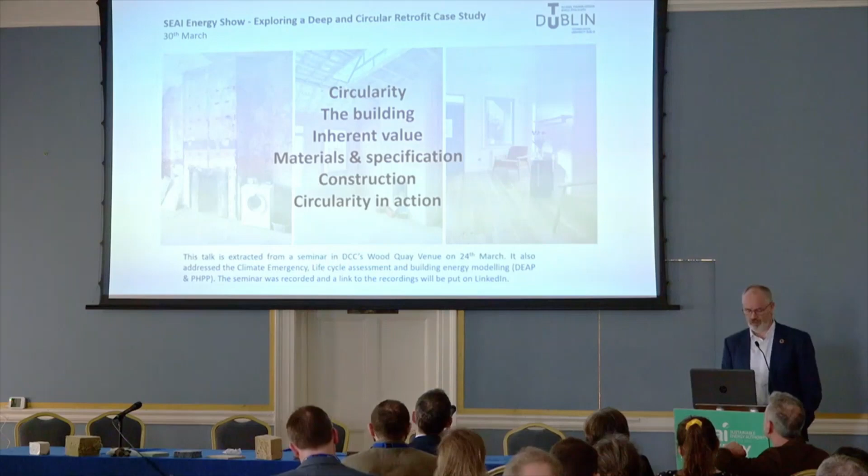So these are the kind of themes in black in the middle that we're going to look at now. The first thing is circularity, and that can have a massive impact on the embodied carbon of what we're doing right now, but also the access to materials in the future, where we cannot presume that the future will have easy access to many materials. We can't actually presume a future where steel beams, for instance, can simply be ordered, or that there is another quarry to provide aggregate for another concrete slab.

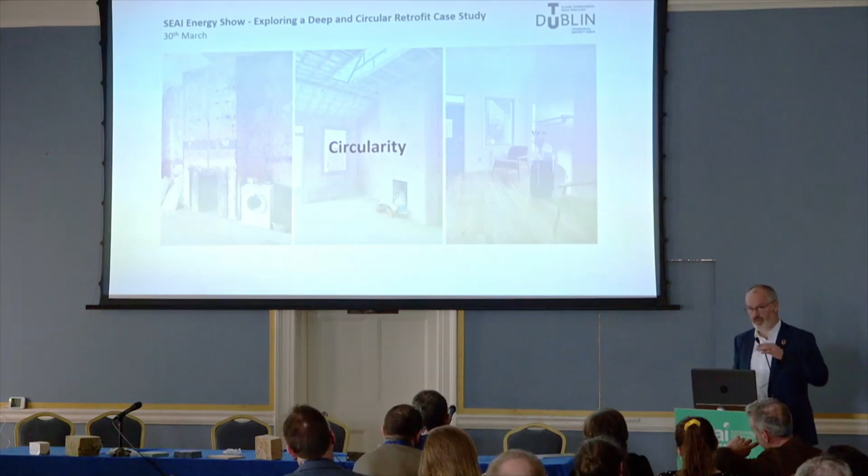We can't, and we shouldn't presume those things. We do need to think more and more about the circularity of the buildings that we make and how we can disassemble them, and those materials can go on further. And that's for new build as well as retrofit. But then Jackie added something to that, saying if there is a moisture risk issue as well, we need to be able to, in some cases, remove those materials simply to be able to actually solve that issue. But that issue shouldn't happen in the first place if we design properly, build properly, and maintain properly.

So in terms of circularity, the catchy reduce, reuse, recycle that my 10-year-old child comes back from school singing a song about, it's not just a jingle, it's actually a waste hierarchy. So, with so many things, we need to rethink what we're doing. Do we actually need that building? Could we have a smaller extension instead? Is the building inherently better quality than we understand? Is maintenance really what's needed first?

The things that we don't do, the slab we don't build. I recently had the experience for a garden room in my own house, a different property to this one, where we were trying to put in screw piles for a garden room.

What stopped us putting in screw piles is that the government limit for height that meets an exemption in planning for a structure in a curtilage is 3 metres. If they made it 3.5 metres, you could have a nationwide campaign to encourage the use of screw piles for garden rooms that people are building everywhere throughout the country, with no concrete at all.

And 18 screw piles get brought in under your shoulder, and each one costs €45. That's possible if we could adjust by half a metre the height of an exempted garden room. Think of that in terms of reusability, disassemblability, lower carbon structures, less groundworks—lots of different conversations.

So there are many, many things that we can do, and some of them are very small measures that can have a very big impact. There's obviously repairing, maintaining that building, repairing that building, using it better. There's reducing the amount of the thing that we need.

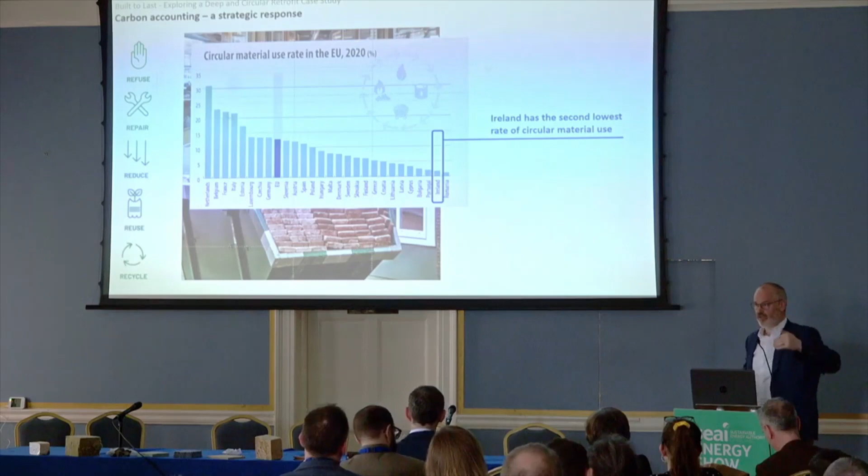We've a long, long way to go. But that also makes clear there's lots of low-hanging fruit. In the same way back in 1991, when we brought in the building regulations for energy efficiency, there was lots of low-hanging fruit in terms of increasing boiler efficiency, heating controls, or lagging your cylinder. Those are all low-hanging fruit for operational carbon. In terms of embodied carbon and circularity, there's a lot of low-hanging fruit wide open for us before we need to engage further.

The Dutch have a lot harder job now to go further than they are, but we need to get to where the Dutch are as soon as possible.

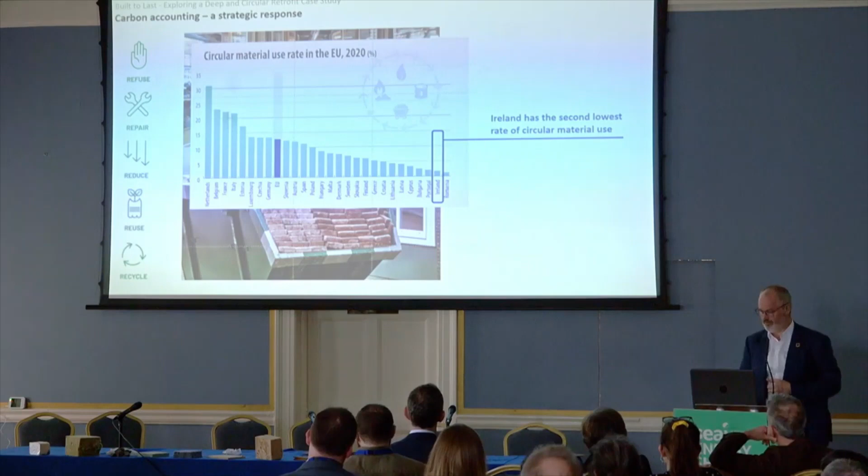So if we were talking about strategies that would help us do that, you could talk about building less and then retrofitting first. The embodied carbon of retrofit is about a third the embodied carbon of rebuilding. Very simple rule, about a third, and I've found that in my own projects as well as other sources. But of course, in building less and retrofitting more, there are multiple other benefits in terms of streetscape.

In terms of settled communities, in terms of the volume, the architectural quality - there's so many other benefits we can talk about.

Why do we have buildings like this? Why don't we just put in a glass box instead of the RDS? All of you could come up with many reasons why the RDS is a beautiful thing, a useful thing, and let's not change it. We can have the same conversations about lots of other buildings.

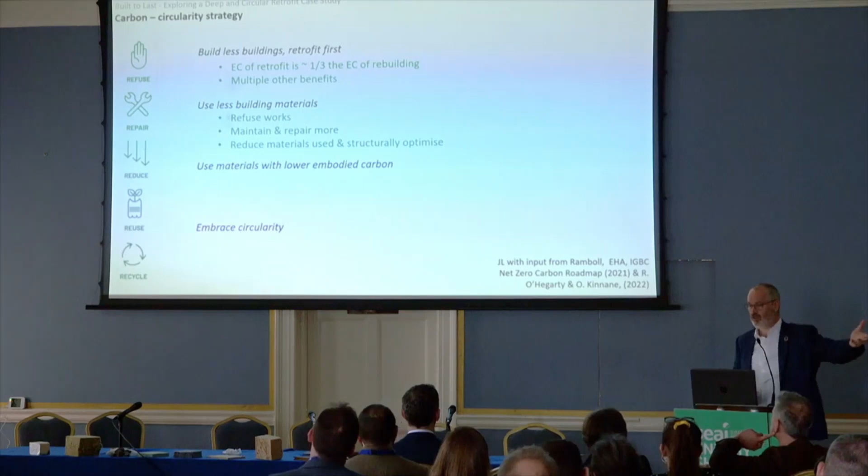But we also need to use less building materials when we do works, and in many cases we need to refuse those works. If you reduce your domestic extension or your commercial new build by 10%, you'd have a very significant impact on the cost of the building and also its impact - but you mightn't even notice the reduction in utility.

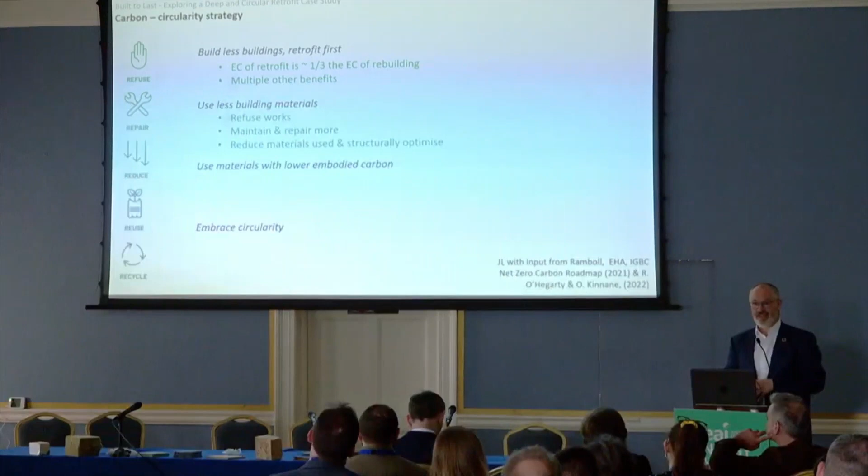If you look at Grand Designs, an intriguing programme on British television for many years, it promotes the building of ground scrapers and horribly impactful buildings far, far bigger than the couples who ever use them. It's intriguing to watch, but it's a car crash in terms of sustainability, even when they use so-called sustainable materials, simply because of size and location.

We need to maintain and repair more. We need to reduce materials used and structurally optimise. In this project, the engineer wanted much larger slabs. We had conversations that were awkward, but they reduced the size of the slab, and in doing so we reduced the impact. Very often there's that conversation too.

Then there's also the specification. Do you need it in the first place? Do you need as much of it? Can you then improve the specification? Again, this is like a hierarchy - shifting the specification to low carbon materials, renewable materials, reused materials.

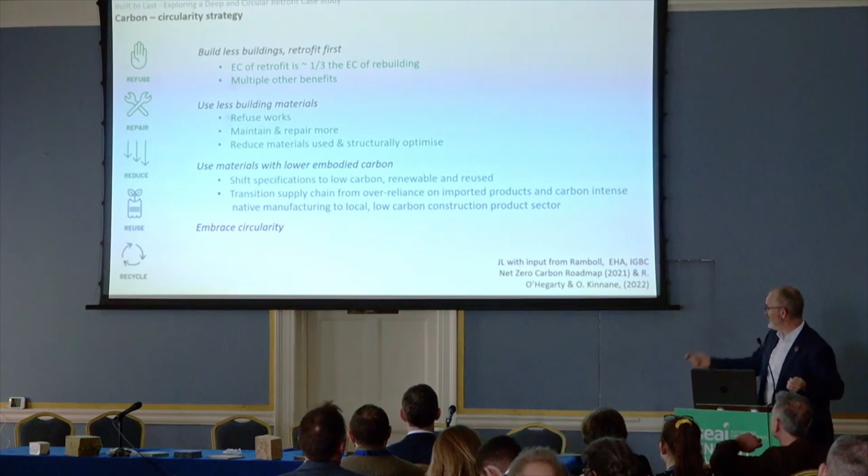Several of the materials on this table are reused materials, and I'll tell you more later in an extraordinary way. We need to transition the supply chain from over-reliance on imported products and carbon-intensive native manufacturing to a local, low-carbon construction product sector. That's good news in terms of the economy, good news in terms of carbon, good news in terms of innovation. But we have to do it anyway.

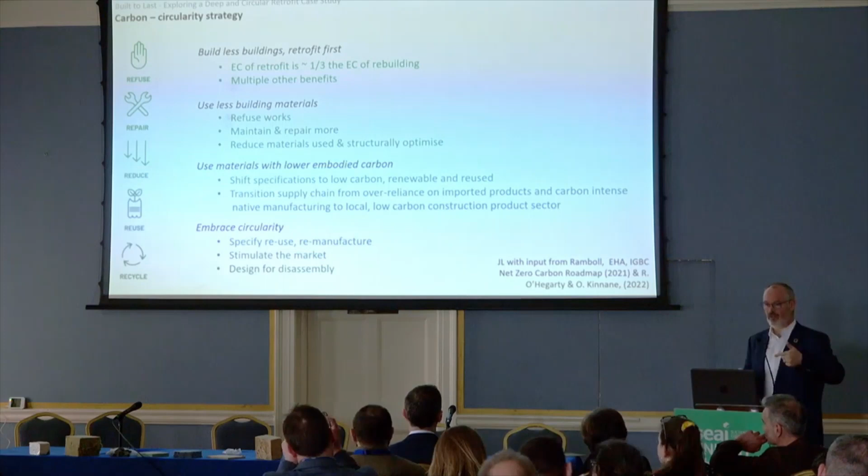Let's embrace it. In terms of circularity, we need to specify reuse and remanufacturing so much more often. We as designers in this room need to stimulate, and clients need to stimulate the market, and we need to design for disassembly because future generations need the materials we're using.